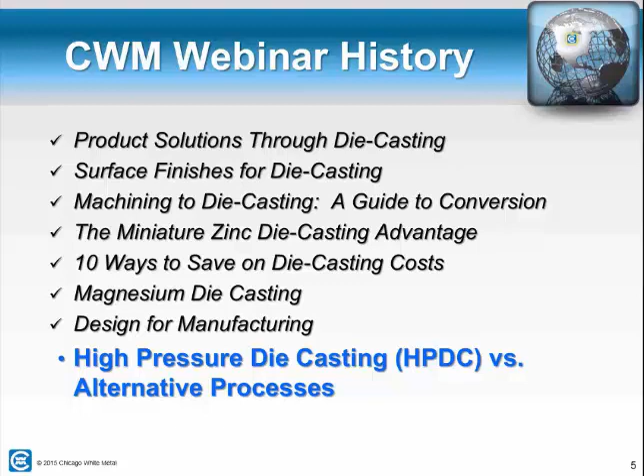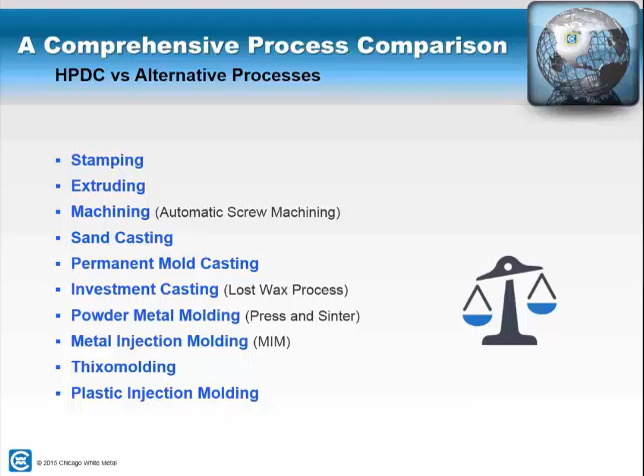Here are the different types of processes we're going to talk about today and how they relate to high pressure die casting, and the pluses and minuses of each. We'll look at stamping, extruding, machining - mostly automatic screw machining, and I'll tell you why when we get to that section. We'll look at sand casting, permanent mold casting, investment casting, which are other casting options besides high pressure die casting that might be suitable for your application, or might not - but we'll cover what they are and when best to use them. We'll also look at powder metal molding, MIM (metal injection molding), thixomolding for magnesium, and plastic injection molding.

So what we're going to do for each process we're going to look at is a number of factors we're going to compare. We'll look at part design complexity, the ability, say, for stamping to make a complex part versus high pressure die casting, that type of thing.

We'll look at dimensional precision, how good your tolerances can be for one process versus the other. We'll look at the processes in regards to whether they make net or near net shape components as they come out of the process, or are there secondary operations that have to take place?

We'll look at the wall thicknesses, which ones need thicker walls, which ones can do thinner walls, the strength and rigidity, which also relate to the type of alloys available for each process. We'll look at what type of surface finish is created by each process, and the relative tooling, production and material costs compared to high pressure die casting.

As well as material utilization—so if there's excess scrap that's produced, say in a stamping, you're going to have a lot of excess scrap produced as the part gets stamped out, that type of thing.

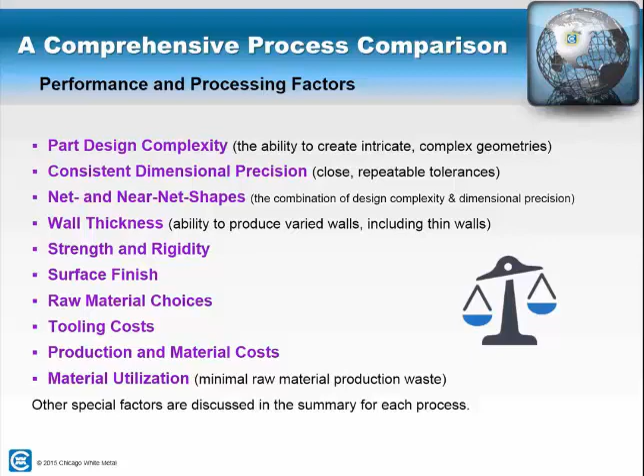So first we'll talk about stamping. For relatively simple part designs, the stamping process can be a great option for you. There are some limitations, and we'll talk about those here shortly. But the tooling cost and production costs are very, very low, especially for simple type stampings.

If the part gets more complex and requires progressive stamping dies or other assembly components to go together to make a part, then you're getting into the realm of maybe it's better suited for die casting, because it can produce a part more net shape than a stamping part can. But again, for very simple part geometries and features, stampings can be a great option.

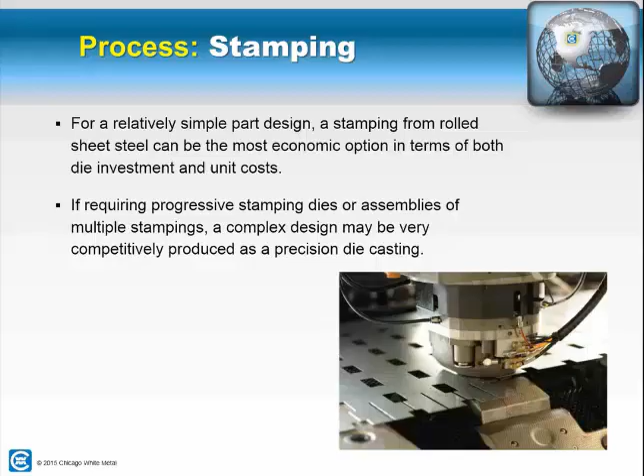So here's the table we're going to look at for each of the processes we're going through. We'll take a little bit of time on this first one for stamping, and then for subsequent processes we may just hit the highlights of what comparisons are better suited for that process versus high pressure die casting.

So part complexity for stamping is relatively limited. As the part complexity goes up, it becomes more difficult to make a stamping. High pressure die casting is excellent—you can have very detailed part features in different directions, and parts can be produced that way very well.

Precision for dimensions, stamping is very good. High pressure die casting is typically a little better for dimensional ability. Net and near net shape components, again for stamping, is very, very good for simple designs that can come out of the stamping die pretty much as it's going to be used, as well as with high pressure die casting.

Wall thicknesses are a big one to highlight here for stamping, because you're only going to get one gauge thickness throughout the part—obviously stamping uses rolls of sheet alloy that's slid through and then stamped. You can have variable wall thicknesses with die casting and get down to very thin wall sections.

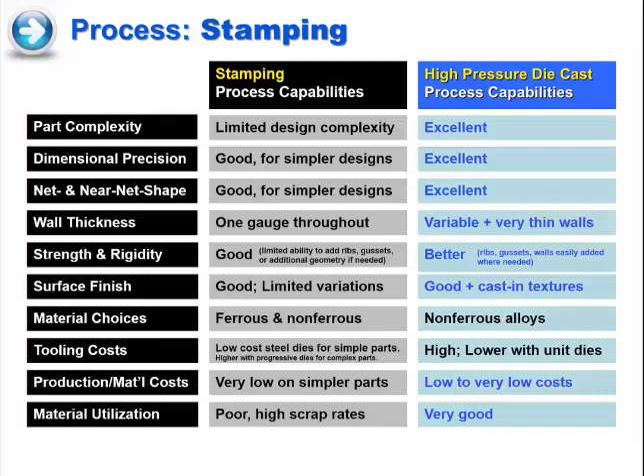So in summary, let's look at this generally. Die castings can produce more intricate parts and features than stampings typically can. Stampings can do deep drawn stamping to get certain features on cup-shaped parts or things with some depth, but you're still limited on the types of features you can do.

Alloy choices are probably better with stampings than high pressure die casting, with more options in the ferrous line of materials. And then the last item, scrap. You're going to have typically more scrap fallout with stampings than with high pressure die casting.

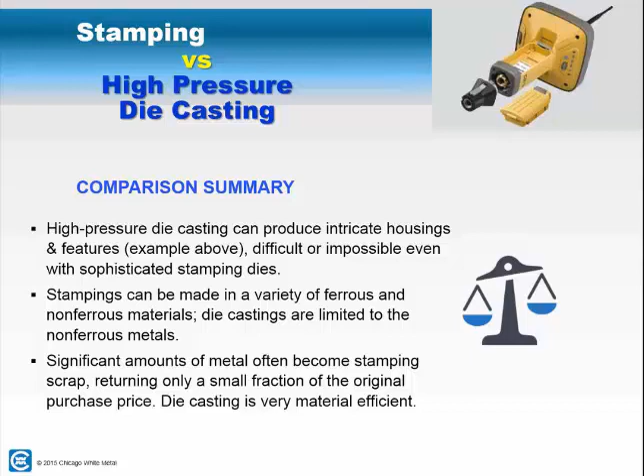Okay, so the second process we'll look at is extruding. Again, extruding can be a great option if the design fits the general parameters of the process. Tooling costs are very low, as is part pricing, assuming you don't have much post-processing. To get the most out of an extrusion, find a part with a constant cross-section they can extrude through the die and then cut to length. If that can be used just like that, fantastic - that's always going to be a much better option from a cost standpoint than a high pressure die casting making the same part.

The problem comes in if you have features perpendicular to the cross section - holes or other features not in that same cross section - then you have to make those with a secondary operation. That's when you get into a more costly scenario, and looking to die casting at that point might make sense because the end result could be a less costly option.

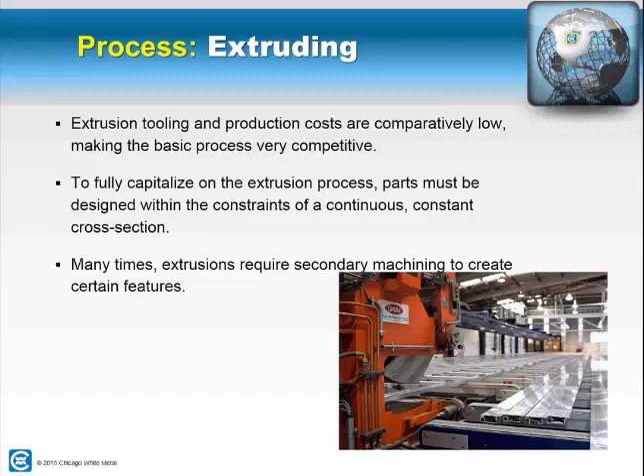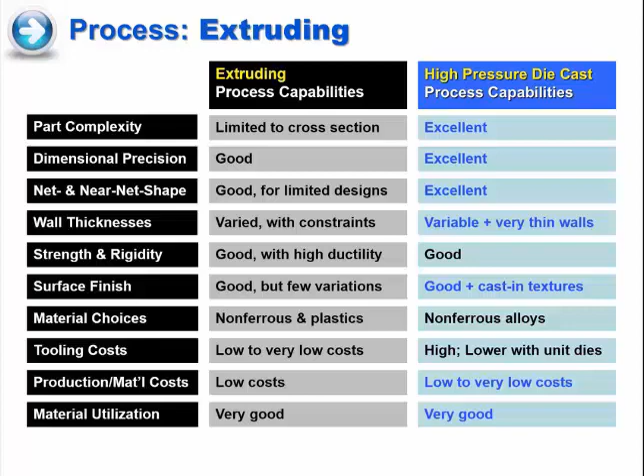So just a quick summary on extrusion versus high pressure die cast: this is mostly alloy driven. You can do more alloy types with extrusions than with die casting, and it's also part design restricted. If it's a very simple cross section and you can do an extrusion, that's great. If it becomes more complex and you need other features, then perhaps high pressure die casting is the way to go.

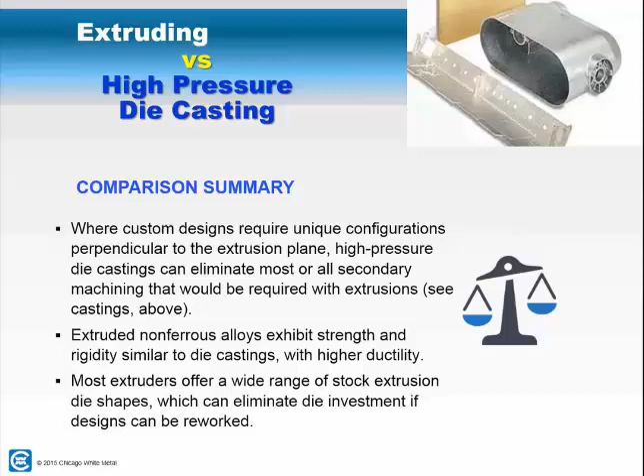Okay, we'll talk about machining, and as I mentioned in the first screen, we're going to focus on the automatic screw machining process versus high-speed CNC type machining.

We did a webinar about a year ago on converting CNC billet machining parts over to die casting, talking about when that makes sense and the best steps to go through that. So if you have a CNC machined part and volumes are going up, and you want to look at converting over to die casting, I'd suggest going back to that recorded webinar online and taking a look.

But today we're going to focus on automatic screw machining, where you have a long bar stock of varying size and shape that is fed through a screw machining operation to produce very tight tolerance, typically small parts. It's a great process, and for specific size and shape parts, it's fantastic.

So what we're going to do is focus this automatic screw machining against what we think would be the competing process for die casting, which is the miniature zinc process. So on the next screen, that's what we're comparing it against. We did a webinar a couple years ago specifically on miniature zinc die casting, so there's that resource for you if you want to go back and take a look.

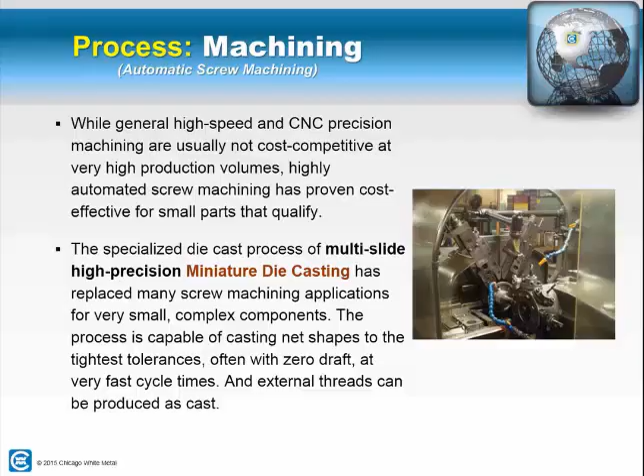On the automatic screw machining table, part complexity is limited in configuration, based pretty much on the size and shape of the bar stock that you can feed into the machine. Obviously, to make some sort of boxy, square, complex-looking part is going to be very difficult through that process. Where the high-pressure die casting miniature zinc operation can make those features very easily and very fast.

Dimensional precision is excellent with machining, more so than what we could do for high-pressure die casting, even though that's very good. You'll get very tight tolerances with screw machining. The strength and rigidity, you can get different alloy types with screw machining than you can with high-pressure die cast. So potentially that's a restriction or a factor that's going to lead you in one direction or another, which gets down to material choices, the ferrous and non-ferrous options.

With miniature zinc, we're limited to the Zamak family of zinc alloys, as well as ZA8, which is an 8% aluminum zinc alloy. Tooling costs are very low with screw machining. Miniature zinc is very low as well, but not quite as low. Material utilization is often a big factor. You're going to have a good deal of scrap with screw machining than you will with high pressure die casting. So when you start figuring that in, sometimes the payback to convert over to miniature zinc makes sense.

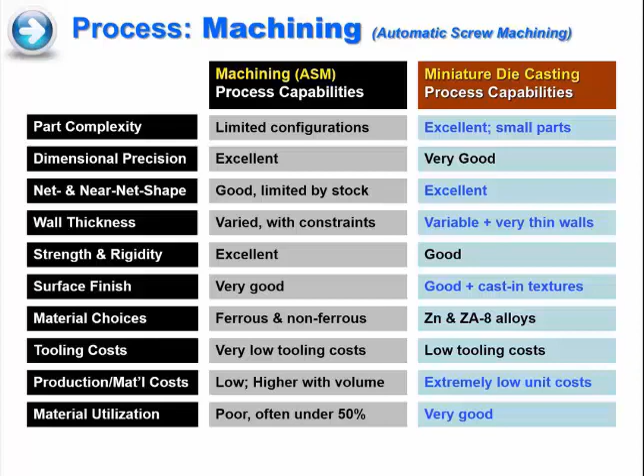So if you look at the main comparisons between the two, this is screw machining versus miniature zinc die casting. Alloy choices are more varied with screw machining than with the miniature zinc side of things. Tolerancing is better with screw machining than the miniature zinc side. But there are much more varied shapes and sizes of things you can do with miniature zinc than you can with screw machining. So you can see the little picture on the right here that shows some of the miniature zinc applications we have, and you can see how that would be extremely difficult, if not impossible, to make those in a screw machine operation.

Typically, if I step back and someone asks me which direction to go when an application comes in, usually alloy type is a factor that leads somebody in one direction or another. It has to be stainless steel, or low carbon steel, or something like that a screw machine can process, and we could not. And that's usually it. Most times that's the reason when somebody would stay with a screw machine option, in addition to tighter tolerances, that type of thing. But alloy type is usually the biggie.

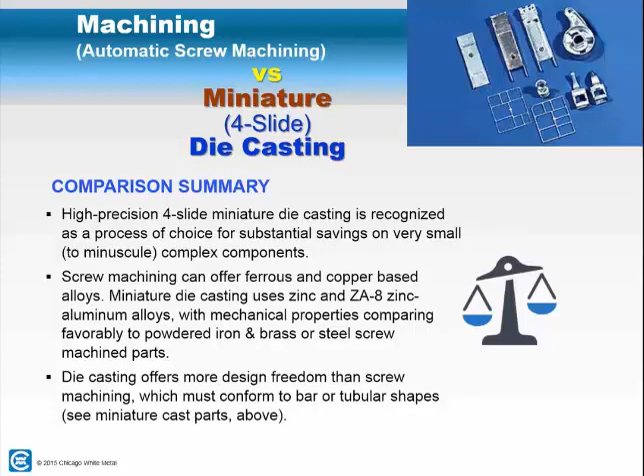Okay, the next few topics we're going to talk about are other types of casting processes that are out there. These are different than what's typically referred to in the industry. When you hear die casting, that's referring to the high pressure die casting world. So these other casting options we're going to look at are mostly gravity-fed options, where the alloy is poured into molds under gravity pressure, or very low pressure. And that's the difference in most of these.

So we'll first take a look at sand casting. Again, this is a gravity casting process where molten metal is poured into a sand-packed molding box that the alloy is poured into. Very good choice for applications and parts that require additional strength and wear resistance and operate at very high temperatures. Sand castings typically have a fairly large wall thickness to them, and can be cast out of alloys and metal types that die casting cannot.

For high volumes, sand casting starts to get a little expensive, so if there is an option to use an alloy that high pressure die casting can function with, that's something you could take a look at to get a cost savings.

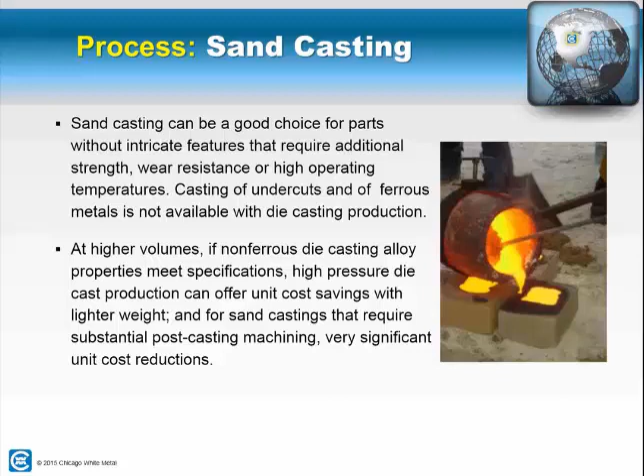But again, we'll take a look at the table here. Dimensional precision is one that I would highlight on this page. It's below average, again because the alloy is being poured in at low pressure versus high pressure die cast, where we can fill the mold very well and get very good dimensional tolerancing. So there's more than likely going to be some secondary operations that have to be done with a sand cast part to get to the tolerances that you need.

Again, that goes into the net and near net shape result. Straight out of a sand cast, you're likely not going to be able to use that part as is. You're going to have to do something else to the part. Wall thicknesses, generally thicker walls are required, whereas with high pressure die casting, we can do very thin walls in comparison.

Because of the different alloys that are available, you can have very good strength and rigidity with sand castings. Surface finish is usually considered poor. The outside part of the sand casting is going to take the shape of the sand that is being poured into, so it typically has a very rough exterior. Possibly some additional cleanup or other secondary operations are going to be needed in order to get the final surface finish you're looking for.

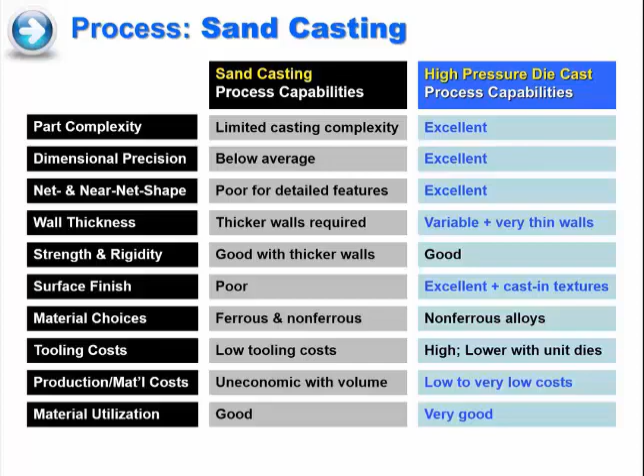So again, just as a summary, sand castings are generally used on larger parts that require very high strength, high wear resistance, that type of thing that needs an alloy type that high pressure die casting cannot do. Usually used in lower volume type applications - that's not always the case, but typically - and it's going to have considerably less tolerance ability from a dimensional standpoint than a high pressure die casting. So plan on doing some secondary operations to get the tolerances that you need.

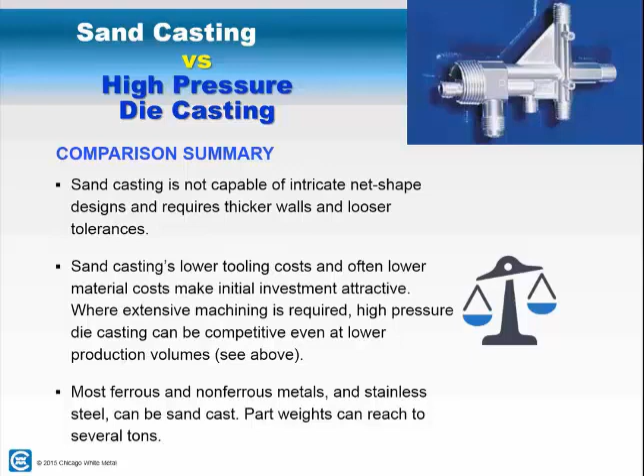Okay, the next casting process we're going to take a look at is the permanent mold casting. It's another gravity casting process, but this uses reusable molds, which is different than the sand cast we just looked at. Tooling costs are typically a little higher with permanent mold, depending on the type of material they use for the dies, but again, it's a reusable die. It can do higher volume type parts a little easier than sand casting.

I think that's it on that page.

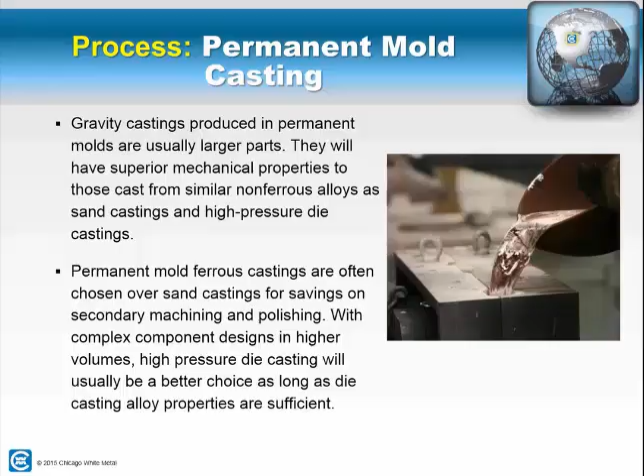So again, looking at permanent mold, if you look at the dimensional precision, it's better than sand casting, but still not meeting what we could do as a high pressure die cast. So plan on some additional processing if you have tolerances that are relatively tight. That goes along with the net and near net shape ability of permanent mold. Wall thicknesses you can do certainly thinner than sand casting, not quite as thin as what we could typically do as a high pressure die cast. So that's another issue or reason to look at one option or another.

Again, good ferrous and non-ferrous alloy choices. So depending on what the application is, if there's something that needs a higher strength or a specific alloy that we can't do as a high pressure die cast, that might be a way to go as permanent mold.

Again, the tooling costs are, we say, medium to high. That kind of depends on what the alloy or material is that you're going to be building your dies out of. It can range from medium to pretty high tooling costs. The production or part pricing we say is medium to low. It is going to be higher than the high pressure die cast, and so it's usually a lower volume, maybe 1,000 to 2,000 piece quantity type project. If it's under that, maybe permanent mold is a great way to go, because when you look at the tooling expense versus the part price, it evens out a little bit at that quantity.

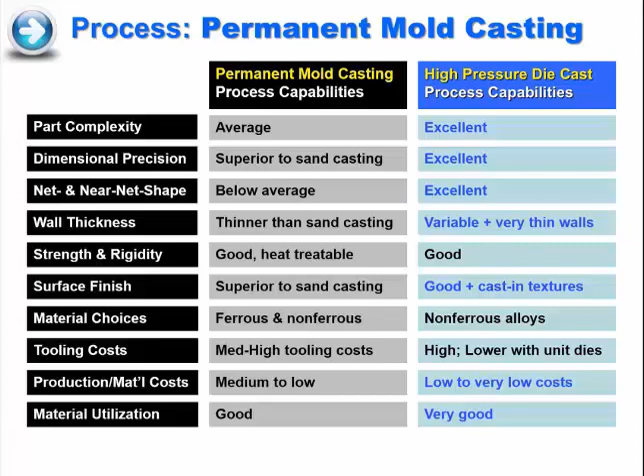So as a quick summary, again, permanent mold, you have better alloy choices than we do as high pressure die cast, or at least more varied - I won't say better, but more varied options. You can sometimes get, or typically get, 100% pressure tightness with permanent mold. That might be a big requirement for your application, where that's something as a high pressure die casting. Typically, if it's going to be a pressure tight requirement, we may go back in and say, hey, we need to add an impregnation process to help that along, where you might not need to do that as a permanent mold. So that's another factor to consider.

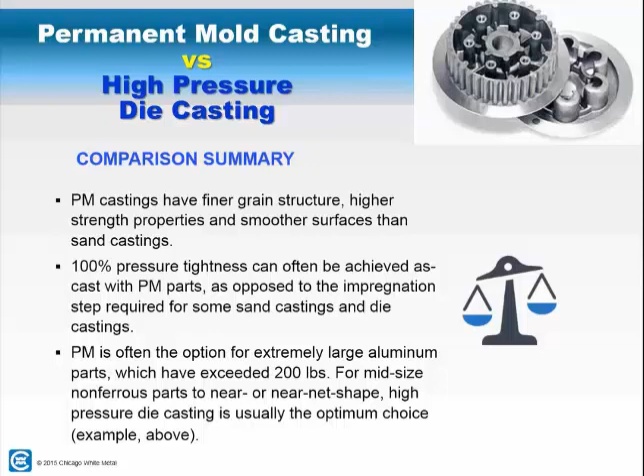Okay, the next process we'll look at is investment casting, also referred to as lost wax. This process results in parts that pretty closely approach the net shape and precision tolerance we get in high pressure die casting. Some other benefits: typically no draft is required for an investment casting, and you can create undercuts directly into the mold, where you can't with a high pressure die cast. That might be done as a secondary machining operation instead. So there are some good advantages for the investment casting process. In fact, we regularly steer people in that direction, depending on the type of part and requirement.

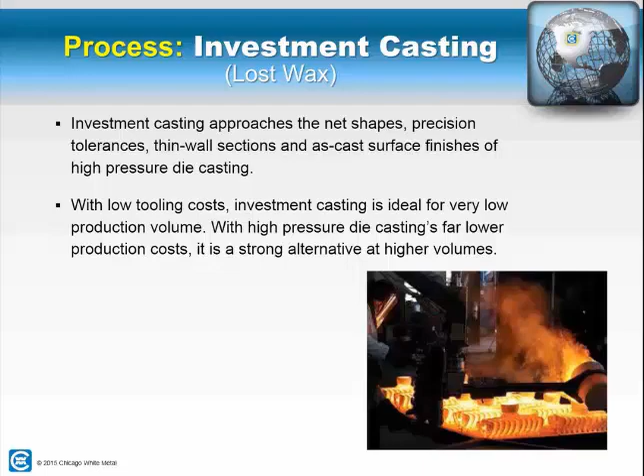The thing here is that it usually makes sense at low quantities. The process itself is rather lengthy to step through to get an investment casting made. So part pricing is considerably higher than a high pressure die cast. It's really a volumetric thing to see when it makes sense to look at an investment casting or a high pressure die cast.

So you'll see in the process table, the investment casting matches up fairly well on most categories along with high pressure die cast, and in fact includes the undercuts, which we can't create in a high pressure die cast. More alloy choices than we have in high pressure die cast. So it's a fantastic process if the volume is not too high, and that's typically where we look at it.

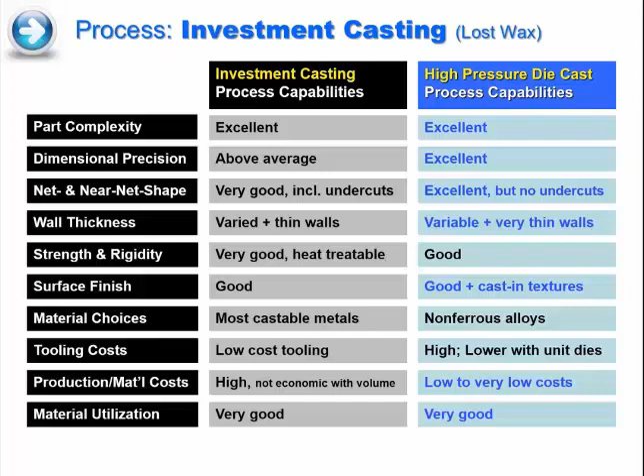So the tooling costs are going to be very, very low. At lower volume applications, investment casting makes a lot of sense. When the volume per year starts to get a little higher, then you may want to start looking toward high pressure die cast, if you can get the same level of part requirements. Then I would look at that direction.

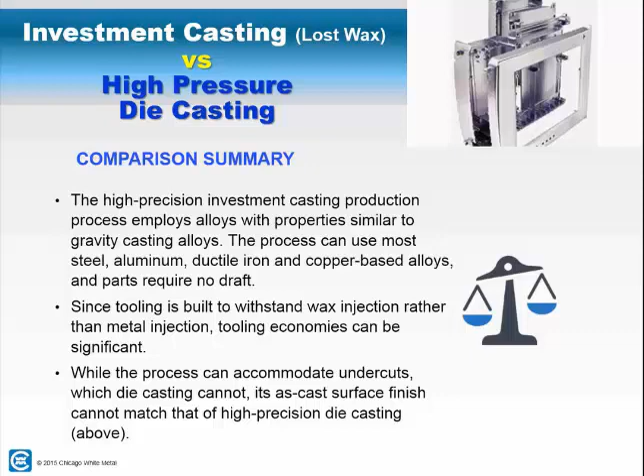So again, just as a summary, more variety of alloy choices, parts with no draft, and undercut features are things you get with an investment casting that you can't with a high pressure die cast. Low tooling costs, but as the annual usage goes up, the part pricing starts to become the overwhelming factor where you may want to look outside investment casting.

Okay, the next process we're going to look at is powder metal molding. This is where powder metal flakes are pressed into a die at relatively high pressure and then sintered to bond the metal together. This typically has the ability to use alloys with higher strength, higher wear resistance. Sometimes it's used when you have to have a stainless steel or a specific copper alloy. So it's got some great usage for powder metal.

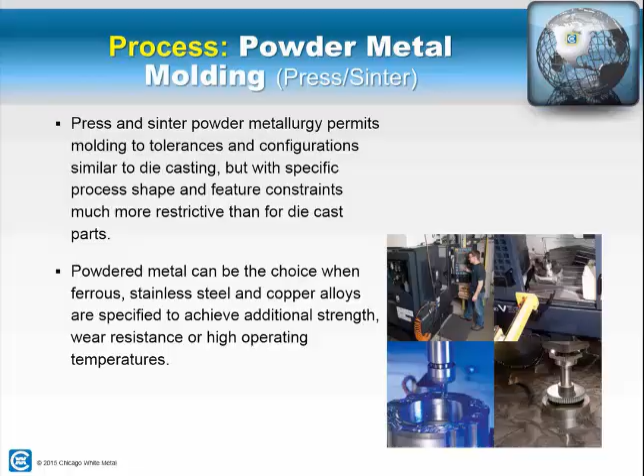So we'll take a look at how it compares to high pressure die cast. Some of the categories compare very well: part complexity, dimensional precision, net and near net shape are very close to high pressure die cast. Wall thicknesses you can get varied, but not too thin - typically powder metal has a thicker wall section than our process. But again, there's a very good selection and variety of alloys available. Tooling costs are not very high compared to us - high pressure die cast typically has a higher tooling cost.

Production costs - this really looks at when the complexity of the powder metal part goes up. If there are features that are difficult for them to make, it can be less costly to look at a high pressure die cast instead.

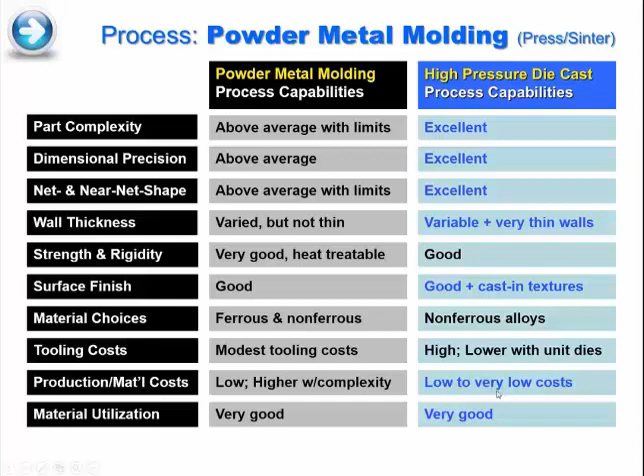I know personally I've worked on many applications where we look to convert a powder metal part over to typically a zinc casting. The zinc alloys have a better chance of having material properties more in line with what the powder metal alloys do. So we looked at converting some things from powder metal to zinc die casting as a cost save, and it's been very successful. That may or may not be the case with every application - it really depends on what material properties the product needs, to see if it could be a good conversion opportunity to die cast.

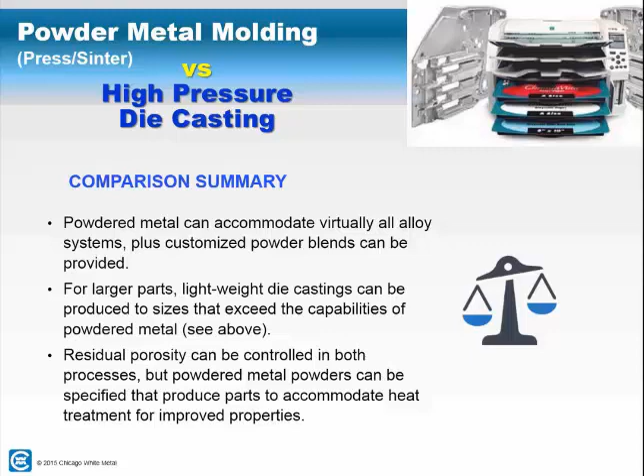The next one we're going to look at is metal injection molding. That's becoming a more popular process these days with very, very small, intricate parts.

This process is where a very fine metal powder is mixed with a binding agent, and then that gets heated and injects as a liquid into a machine very similar to a plastic injection molding machine. That's how it's injected into the die.

Once injected, the parts go through a debinding process to remove the binding agent, and then the parts get sintered to remove whatever remaining binder agent is there and give it its final geometry. That sintering process alone sometimes takes between 15 and 20 hours to process.

So it's a pretty detailed and rather lengthy process, but it does give the ability for very, very small parts to utilize ferrous alloys and other types of alloys that have very hard and good strength characteristics.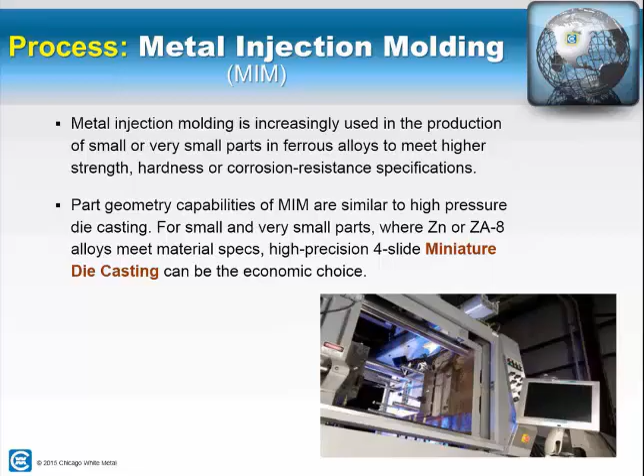Since these are usually limited to smaller parts, we're going to compare this to the small miniature zinc die casting process as a side-by-side comparison, because that's probably the most accurate comparison for us to do.

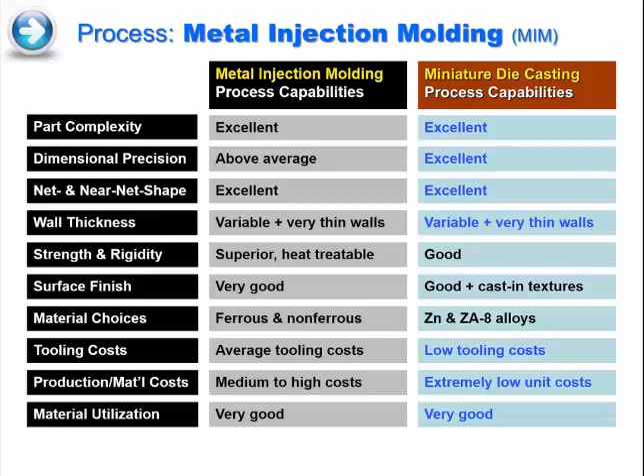Tooling costs are average, is what we're saying. It's probably a little higher than the high pressure die cast, but production costs are typically very high compared to the miniature zinc process. So here again, it usually comes down to your application and what the material properties are needed for, and to see if there's an option to convert over to the miniature zinc process.

If your product can use a zinc or ZA8 alloy, then the part pricing will typically be much better. So something to consider.

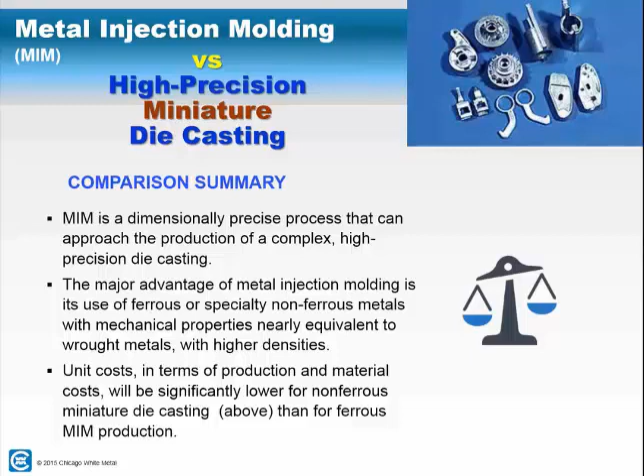Okay, the next process we're going to look at is thixomolding. This is specific to magnesium alloys. So we'll compare this to the magnesium high-pressure die-cast process that we have.

Here, magnesium alloy chips are fed through a machine, again similar to an injection molding machine, and then heated to a semi-solid state before it gets injected into the die.

This process produces parts very similar to magnesium high-pressure die casting. We have on here that the process has the ability to offer improved material properties and lower porosity. I think I would agree with that, but I'd probably caution you to be careful with that claim.

We've seen a number of thixomolded parts come to us from customers who have not had a great experience, and when we do some sectioning and other things, they're certainly not porosity free. So just be careful with claims that it can be a porosity-free process, or even significantly lower porosity than high pressure die cast. Other than that, the things are similar between thixomolding and high pressure die cast.

There are very, very limited thixomolding suppliers out there, and machine builders. So there are very few people who do this.

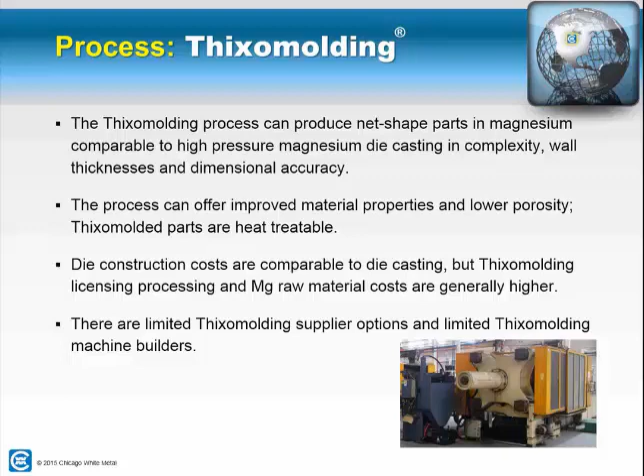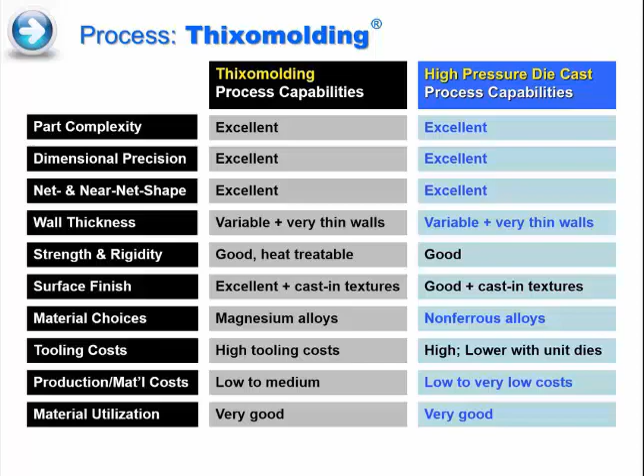Tooling costs tend to be a little higher with thixomolding than high pressure die cast. But again, the processes are very similar, so again very comparable to high pressure die casting.

As I mentioned earlier, we did a specific webinar a couple years ago on magnesium high pressure die casting. So if you have any specific questions about magnesium, where it's used and why it's used, I would suggest you go back and take a look.

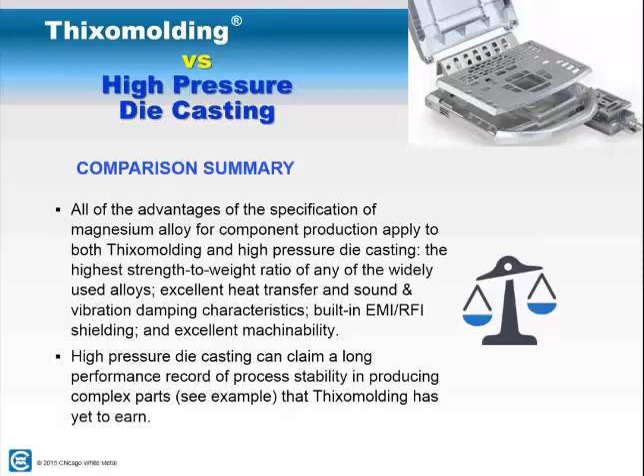Okay, lastly, we're going to look at the plastic injection molding process. We see a lot of people come to us with parts that started out as injection molded plastic, and for a variety of reasons they need to try to convert to a high pressure die cast alloy.

Typically it's for mechanical properties. Somebody needs a little more strength or impact resistance or rigidity, that type of thing, so maybe plastic is not quite the right material, and maybe one of the alloys we have as high pressure die cast would work better.

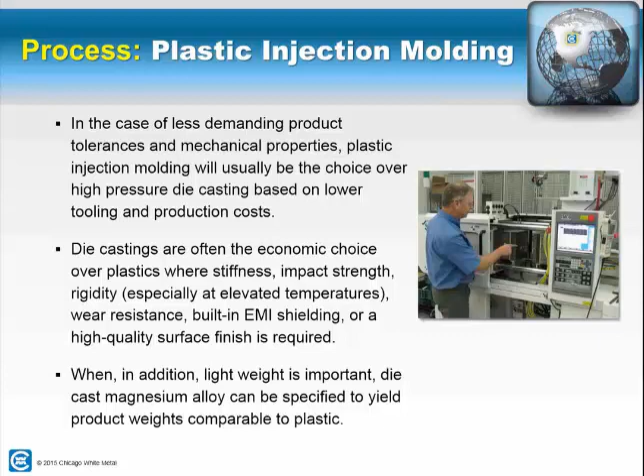But there are certainly a number of instances where plastics will be certainly fine for your application, and we'll take a look at how things compare here.

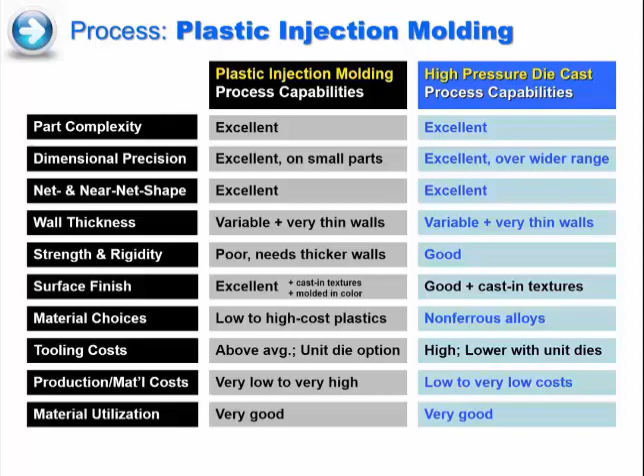But again, it usually comes down to what application you have and what factors you might need for strength and that type of thing. For electronic components, a lot of times people will have to add some sort of EMI protection to their plastic part in order to get the EMI shielding that they need. Die casting, specifically magnesium die casting, will have a very similar weight to plastic, but also offer the inherent EMI protection that you'll need, so you don't have to add that as a second operation.

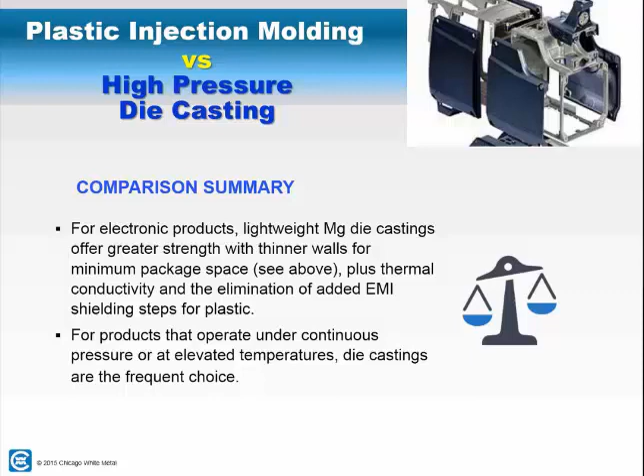So it could be very useful if you have an application that just needs a little higher strength, or you have to add certain process steps to plastics to get it to work in your application. Maybe magnesium die casting is the best way to go, because you'll be able to get the similar weight that you have with plastic and also have the added benefit of added strength and EMI protection, that type of thing.

So just a few summary pages here that we'll go through and look at. Here are some examples of some of the intricate shapes and types of features that you can have with high pressure die cast parts.

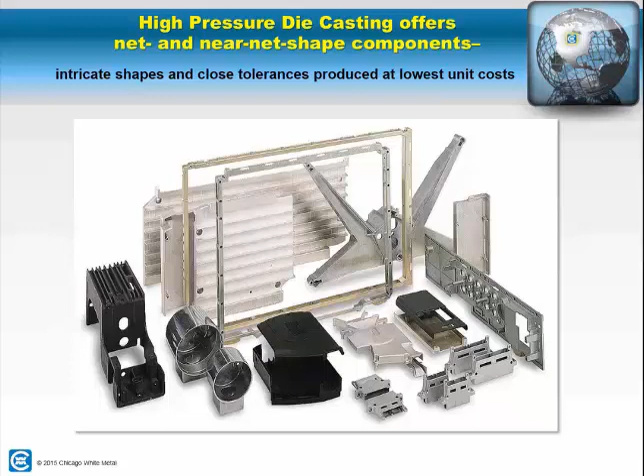Some of the cost benefits that we see with high pressure die casting versus some of the other process steps we looked at: again, can get very complex near net shaped designs as cast with high pressure die cast. Minimal draft angles depending on the part and the geometry of the part and what alloy you're using. Very good surface finishes as cast.

Again, I keep harping back on previous webinars, but we did do another webinar on surface finishing for die cast. So there's a whole hour's worth of information about what you can do for surface finishing on die cast, and that is a fantastic one to go back and take a look at.

Good variety of options for alloys for high pressure die cast with varying physical and mechanical properties that will hopefully work for your application. And it's a fully proven, stable process. It's been around for a long time, and it's a proven process.

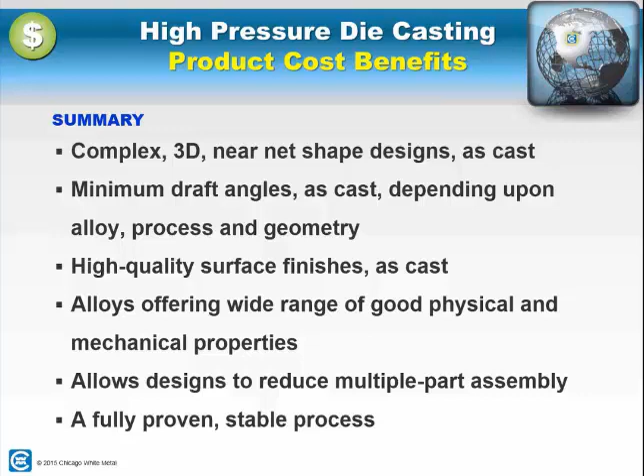Some of the product performance benefits: good strength, stiffness, and rigidity. Again, we talked about surface finishes - it provides a very nice finish for what your final finish is going to look like. Excellent RFI and EMI shielding properties, especially magnesium that we discussed. All of the alloys that we use are 100% recyclable - the aluminum, magnesium, and zinc alloys are fully recyclable, so that's a great thing to have. And it has the look and feel that only metal can provide.

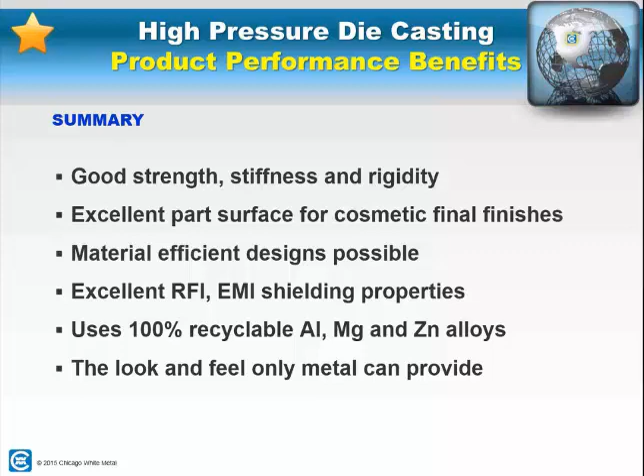It's looked at specifically for electrical electronic products. Again, we talked about the inherent built-in EMI RFI shielding. Very good thermal conductivity with the alloys that we can use for high pressure die cast. So many customers will integrate heat sink features or other thermal conductive features into a part, into a die casting, hopefully to save money. Hopefully you can combine an existing heat sink maybe with another housing and get it all as a one-part die casting and hopefully save money that way.

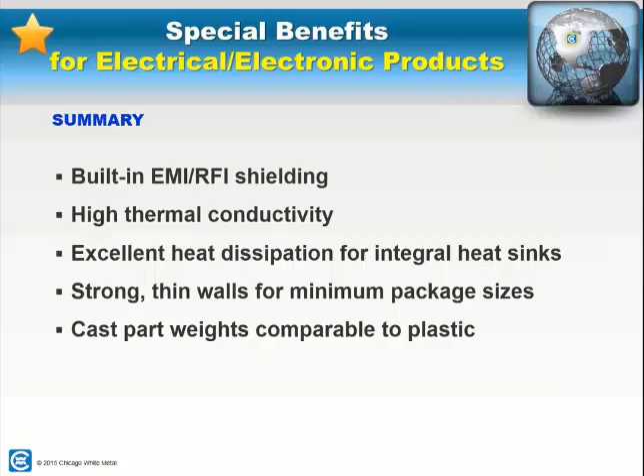And the last item on here: the cast part weighs about the same, if you look at magnesium, about the same as plastic. So it's a great option for very lightweight applications where you need a little more strength and some other mechanical properties. Some guidelines that we talk about for how to get the best results from what you're designing: try to think about the part function first, what it's going to do, what the requirements are going to be, and then look to find the optimum process that fits.

Choose a producer who offers a good variety of processes and alloy types, and who will get you going in the right direction. Many times a week, somebody will come to me and ask if high pressure die cast is the best fit, or if they should look at another process. I'll be straight up and tell people if it's not something that works for high pressure die cast, there are probably other processes better suited, and I'll get them going in the right direction.

We'd advise getting whoever you select to produce your part involved early. Going back to the last webinar we did on design for manufacturing for die casting, it really spelled out the benefits of involving the vendor early, what's involved, and what benefits that has. It was a great webinar to go back and take a look at.

Outline all post-production requirements as best you can up front. This goes back to surface finishing. In our webinar on surface finishing, we had the catchphrase 'start with the finish in mind,' which is a little cheesy but really true, because if you're going to have a part with a very highly cosmetic finish, like powder coat or wet paint, that will trickle back down into how you design your tooling and how you do deburring. So it's really important for us to understand what the end result will look like, and then we can help guide you in that direction.

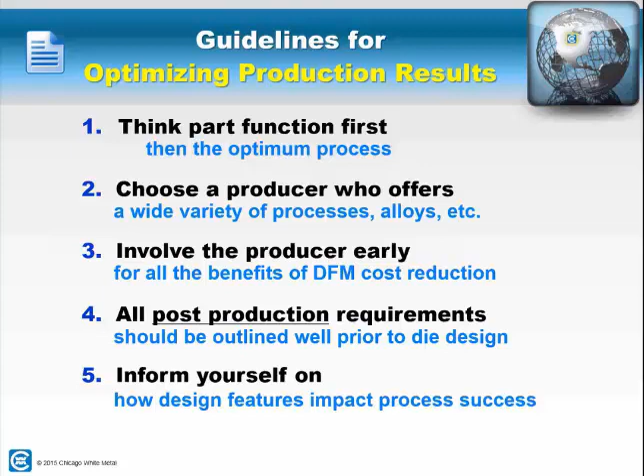Some of the reference materials we used for this webinar are loaded on our DC2 section of our website, along with a tremendous amount of other resources, papers, and guides for a number of topics. I urge you, if you haven't already, go to our website and take a look at what's there. All of the past webinars are also there for you to review, and it's actually a wealth of information.